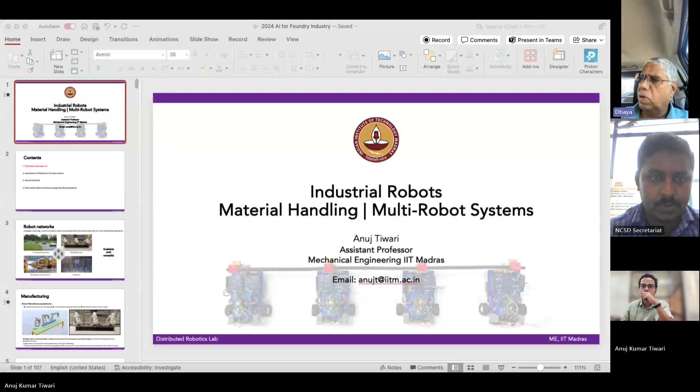It's okay sir, working, thank you. Sir, you can close it, we are expecting around 60 to 70 people, so once some 40 people join, then we will start the program.

The agenda is like this. First we will welcome the gathering. Second, we will read your biodata. Third, you can start the presentation. Then at the end of it we will see if any questions are there. We will ask the participants to ask questions, you have to answer, and then finally we will thank everyone and close. This is the program agenda, sir.

Thank you, is there any doubt or clarification required? No, thank you. Okay, we will wait for a few minutes, sir.

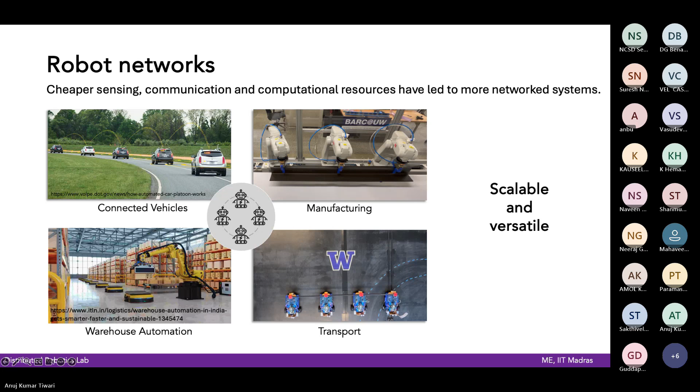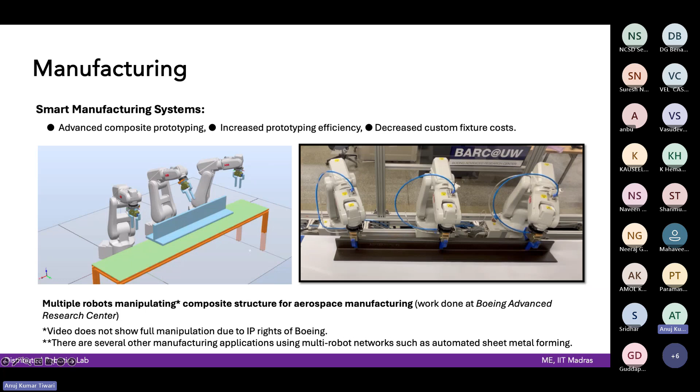One application I looked at during my postdoc was advanced composite manufacturing, where we wanted to use these multi-robot networks for handling and molding composite structures that were still in their green state, that is, not yet cured. This was looked at for decreasing custom fixture costs, and this work was done at Boeing Advanced Research Center.

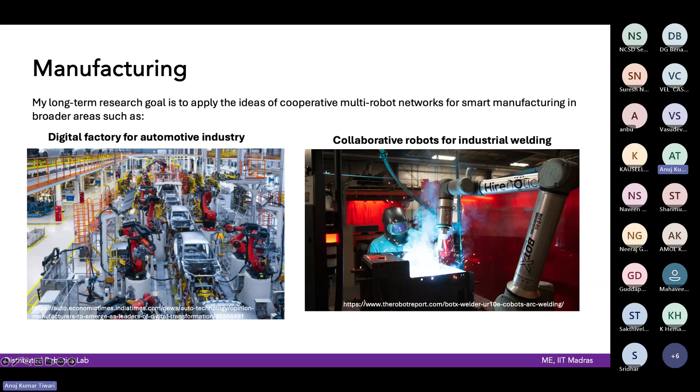Besides that, my long-term goal is to bring industrial robots into the automotive industry and other applications such as welding. Since I'm talking to people from the foundry industry, robotics also has applications beneficial for the foundry industry. For instance, high temperature molten metal, dust, noise, and fumes can make foundries unpleasant and hazardous places for people, so these are ideal locations for robots configured to work in these harsh environments.

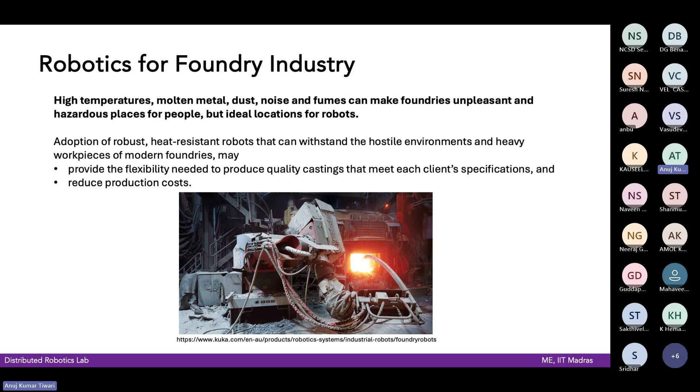Adoption of robust, heat-resistant robots that can withstand the hostile environments and heavy workpieces of modern foundries may provide the flexibility needed to produce quality castings that meet each client's specification and reduce production costs, because the same system can be used to form multiple different castings.

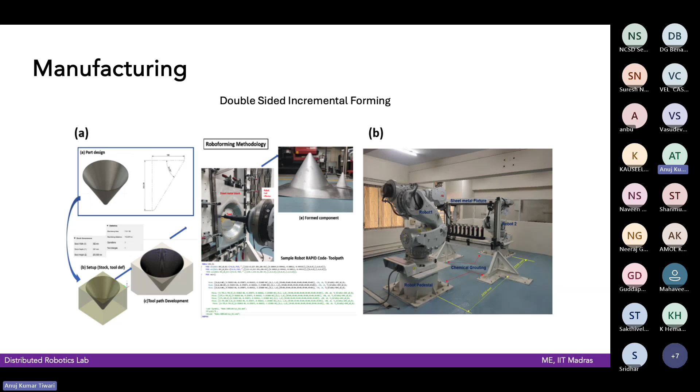That was one of the rationales behind using robots even in double-sided incremental forming, because traditionally you use a die and make a component by punching that die into a sheet metal, which is usually easy to control and implement. But it is not very cost effective during the prototyping or designing phase, where you want the same system to make different shapes, while a single die can only make a single shape. So you want a system efficient at prototyping different shapes using the same tool head, which decreases custom die costs and lets you make different components using the same forming system.

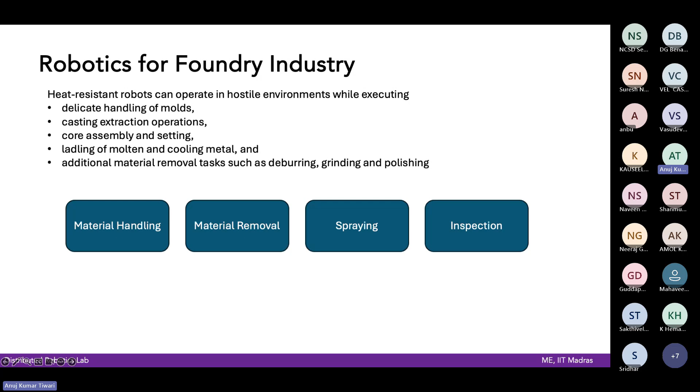Heat-resistant robots can be used to handle many different applications within the foundry industry: handling of molds, casting extraction operations, core assembly and setting, ladling of molten and cooling metal, and additional material removal tasks such as deburring, grinding, and polishing. Today, the research I will present deals mainly with material handling, but similar concepts can be expanded to many other applications within the foundry industry.

Now, as we know, when we talk about robots, we have to talk about types of robots. We can have Cartesian robots, which only have degrees of freedom in the X, Y, and Z domain. So these are called Cartesian robots.

Articulated robots have serial joints. These are the most popular type of industrial robots we see.

You can have SCARA robots, which can have very high stiffness in one direction. So this can be used for operations where there is a high contact force at the end effector of the robot in one particular direction, but then it can move in a plane very easily.

Delta robots are mainly used for handling very delicate systems, mainly used in surgical robots.

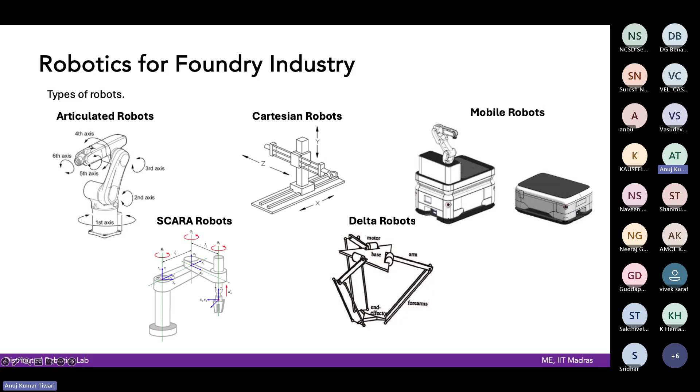You can also have mobile robots, where the robots are not fixed at a particular location but are mounted on mobile systems, which can make it a mobile manipulator. These can be used many times in warehouses or factory floors for material handling.

So we'll focus a little bit more on industrial robots. Then we will try to go a bit deeper into the research that I have done in material transport using multi-robot networks. As you have seen before, even robots can be of multiple different types.

Cartesian robots, articulated robots, SCARA robots - there are more types of robots such as cylindrical robots and spherical robots. These are different joint configurations that you can have, and it makes the available workspace of the robot different based on the different types, and also certain features like high stiffness in certain directions compared to others.

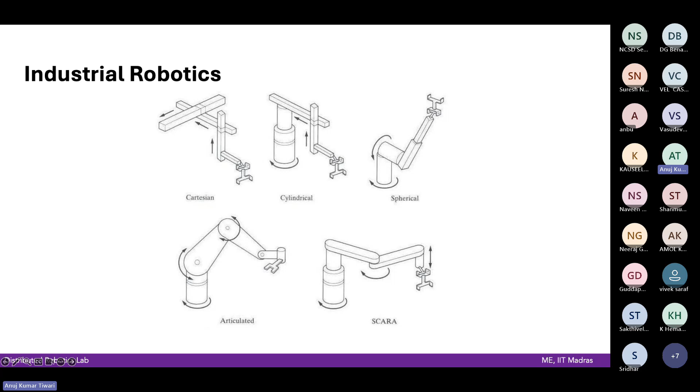So let's try to see what are the different components that you need to think about when you're talking about using a robot in one of your own applications.

Let us consider the following task: a very simple task of picking up an object from a tabletop and placing it at another place on the tabletop. In order to implement this task, the robot has to first determine the position of the object relative to the base of the robot. For that, it can use some perception sensors such as vision.

Then it needs to move the gripper, that is the tool at the end effector of the robot, towards the object without colliding with the environment. That means it needs to plan the path of its tool and control the tool to follow that path. So planning and control are another component of industrial robotics.

Then it needs to grasp the object. Let's say you have an off and on button - this is a pneumatic gripper. It can turn on the pressure or turn off the pressure, so it will either close, open, or change the direction of the pressure.

Then after grasping the object, you move the grasped object towards the desired position without colliding with the environment again, and then you release the object.

Some industrial applications of industrial robots include assembly, drilling, riveting, etc. But they require precise control on even the contact force, not only on the trajectory of the end effector, where the robot has to come into physical contact with the environment.

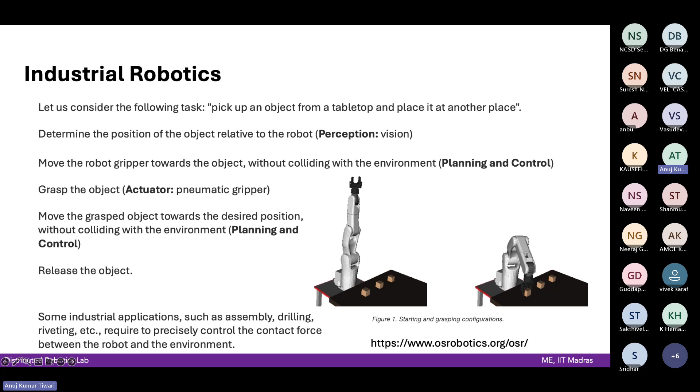So for the robot manipulator to perform a task, for example grasping or drilling like we saw in the previous slide, one needs to bring its end effector to an appropriate position or orientation. But when you look at a robot, you first see the joints, and joints have motors, and you can usually control only the motors. So motors are the actuators in this particular system.

So you want to do a task which is in the end effector domain - that is the task space. But let's say you can only control the angles. So you need to form a relationship between the joint angles of the robot and the corresponding position or orientation that the end effector takes for those joint angles.

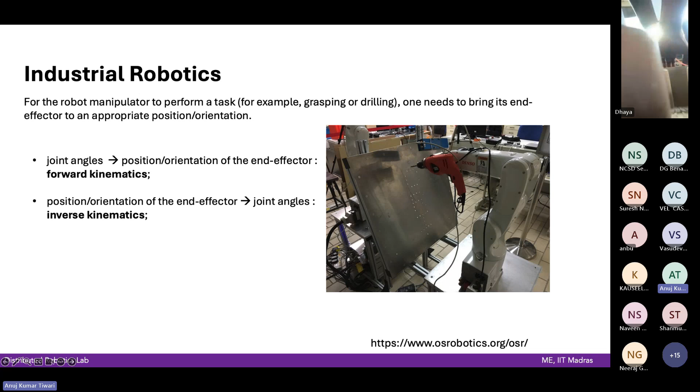So this is called forward kinematics - this relationship between the joint angles of the robot and the end effector position. The reverse is called inverse kinematics. Given a position or orientation of the end effector, what will be the joint angle that will give you that position or orientation of the end effector of the robot - that is called inverse kinematics.

But as you can see, this is very non-linear. If you've done any course in controls or systems, you know nonlinear systems are very hard to control, because the mapping is not linear between theta 1, theta 2, and x and y. So this is not very easy to implement.

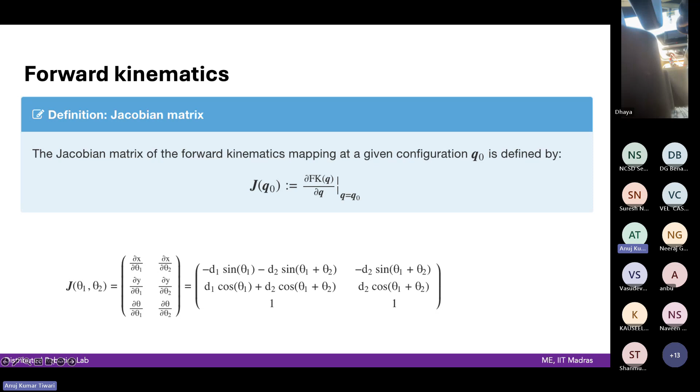Now, this is only a two-link robot. If you increase the number of degrees of freedom, a general robot you'll get in your factory will be a 6 degree of freedom robot, unlike this one which only has two, if you exclude the motion the gripper can have. So this equation becomes even more complex. For that, we use the Jacobian matrix, which relates the rate of change of the end effector position to the rate of change of the angles of the joint motors. This Jacobian is easier to work with, because it changes the system into a linearized one.

Suppose that we want to place the gripper end effector at some x desired and y desired. The gripper orientation does not matter for now, so we don't take that into account. We want to find the corresponding theta 1 and theta 2, which we represent as theta 1 star and theta 2 star, that achieve this end effector position for this two-link robot.

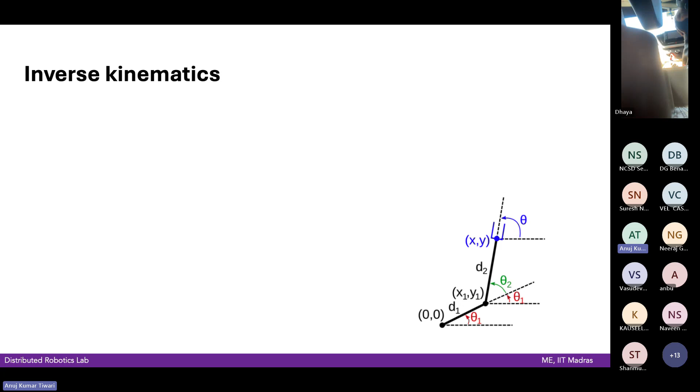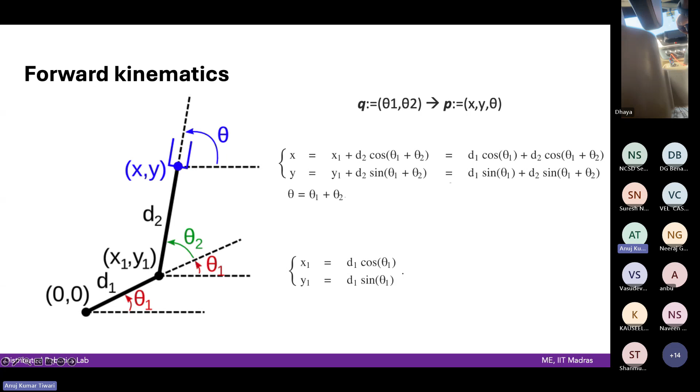For that, you can try to solve it using trigonometry. What we actually do is take the square of this and add. We see that somewhere it will be cos squared theta 1 plus theta 2, sin squared theta 1 plus theta 2. If you take d2 squared common, it will become sine squared plus cos squared. From trigonometric relations, remember sine squared plus cos squared equals 1. That's how you simplify these non-linear trigonometric terms into only linear terms, after which you can get theta 1, and similarly you can get theta 2.

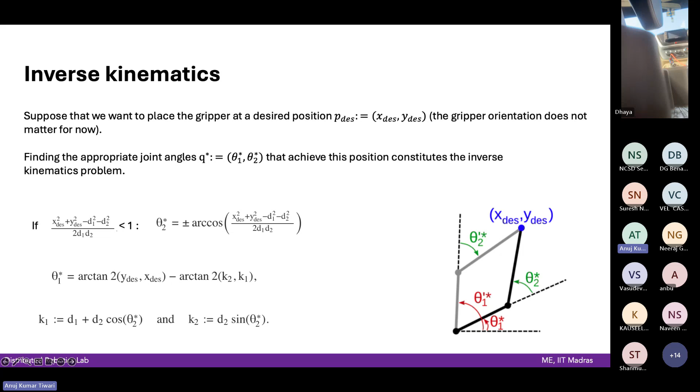So you can get theta 1 and theta 2, but again these are not very easy things to find out. We can do it by hand for a two-link robot, but for a 6 degree of freedom robot, it is very hard to solve by hand.

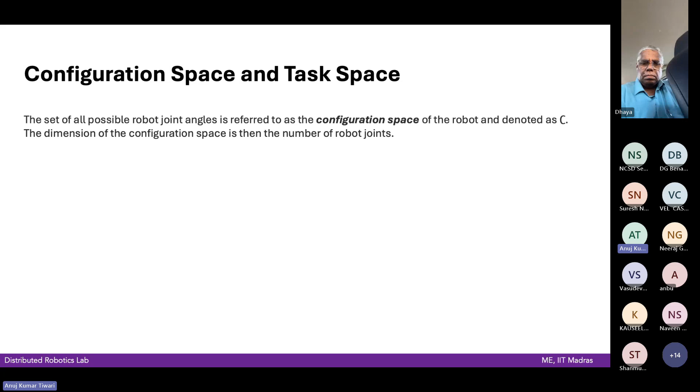So this is where we want to talk about configuration space and task space. Task space, like I defined before, is the end effector space where you have to do the task, either drilling, polishing, or material handling — you are only concerned with the end effector position. Whereas configuration space is the angle space of the robot, that is theta 1, theta 2, up to theta 6 if you have 6 joints. The set of all possible robot joint angles is referred to as the configuration space, denoted as C. The dimension of the configuration space is the number of robot joints, so a two-link robot will have a two-dimensional configuration space. The task space is defined with respect to the task at hand, so it is not fixed — it depends on the particular task you want to do.

Let me explain through an example. To properly grasp an object, when the task is grasping, the end effector of the robot must be placed in a precise 3D position and 3D orientation — your XYZ is fixed, and your theta X, theta Y, and theta Z are fixed. In this case, the task space is the set of all desired 3D positions and orientations, which has dimension 6, because we have 3 translational coordinates and 3 rotational coordinates. So even your task space has 6 degrees of freedom.

Whereas in a drilling task, one needs to place the tip of the drill bit at the desired location, so its XYZ is fixed. And to ensure the drill bit is perpendicular to the drill surface, it has to take care of theta X and theta Y, 2 orientation coordinates. But the drill is anyway rotating freely in theta Z, so the rotation around the surface normal is irrelevant — you can still drill for any theta Z value. So in this case, the task space dimension is 1 less than the previous example: only 3 translational dimensions and 2 orientation dimensions, so the task dimension is 5 here.

The reason we want to think about configuration space and task space when using a robot is that, in general, the dimension of the configuration space must be larger or equal to the dimension of the task space. Configuration space is the ability of the robot, and task space is the required degrees of freedom to do a task. If the ability of the robot is less than the degrees of freedom needed for a particular task, then that robot cannot fulfill that task.

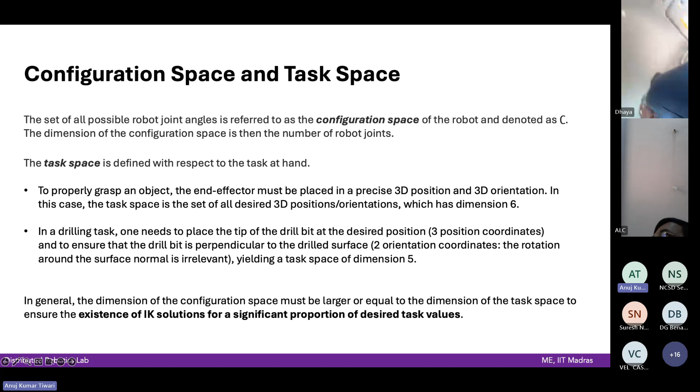So the ability of the robot should always be greater than the task space requirements. That is, configuration space dimensions must be larger or equal to the dimensions of the task space to ensure the existence of inverse kinematic solutions for a significant portion of the desired task values, so that you can find theta 1 to theta n values for an n degree of freedom robot given an XYZ location of the end effector.

Now, when you have more joint angles than the dimension of your end effector space, you can have multiple solutions which satisfy your task space condition. Let's say your condition is to keep the end effector of a two-link robot at x equals x desired, where you don't care about y. Your task space dimension is 1, but you have two options, theta 1 and theta 2, and different combinations of theta 1 and theta 2 can give you x equals x desired. All have the same x value but different y values, but you only want to control x. So it will have redundant solutions.

So how do you pick one solution out of these? You can add some optimization conditions and try to fix these two theta values on top of it. But this is something that arises when your configuration space has more dimensions compared to the task space dimensions.

We have seen in the inverse kinematic derivations for the planar 2 degree of freedom manipulator in the previous slides, where there were so many sine and cosine terms, that the equations are quite complex, involving multiple inverse trigonometric functions, tan inverse, and validity conditions, like something should be less than 1 to be an argument of cos. For general 6 degree of freedom manipulators and 6 degree of freedom task spaces, which constitute the most common use of inverse kinematics, most task spaces are high dimensional, and most robots have 6 degree of freedom manipulators.

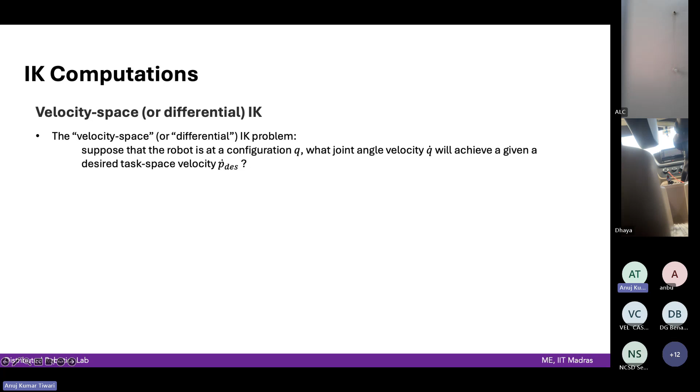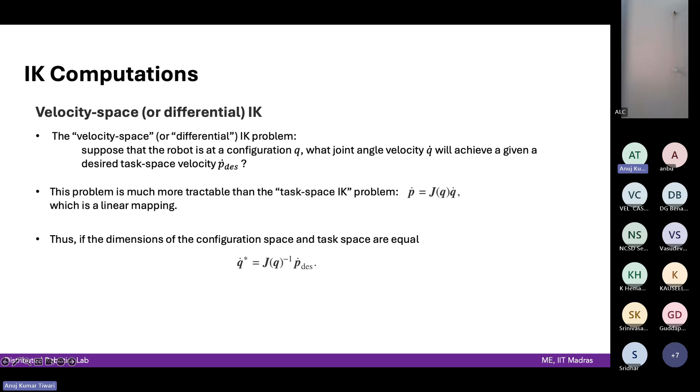For that, you can use the Jacobian of the robot at the particular configuration value Q, because it is a function of Q, and this is a linear mapping. Once you have written it like this, you can write Q dot equals J inverse P dot, because J is a matrix and becomes constant when you set the values of Q. This inverse is only possible when J is a square matrix, and it is a square matrix only when Q has the same dimension as P. That is, if P is 6-dimensional, Q should also be 6-dimensional.

If the dimension of the configuration space is strictly larger than the dimension of the task space, that is the redundant case where multiple joint angles are possible for the same end effector position, then we have multiple solutions, of which an optimal solution can be chosen. For instance, if one is interested in the smallest joint angle velocity, then taking the pseudo inverse of J, which you must have read about in your mathematics classes, can be used to find Q dot given a P dot.

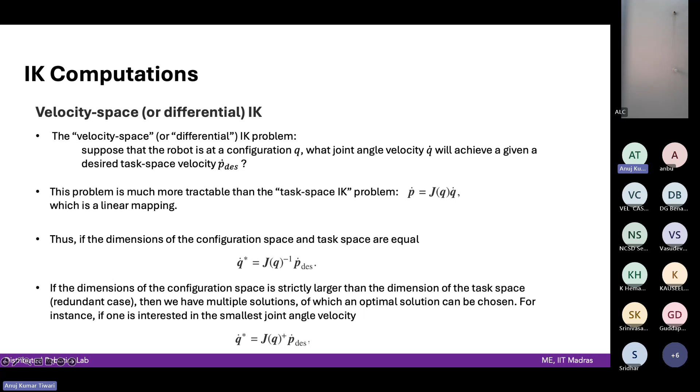And all these computations are taken care of for you. Rapid is a programming language developed by ABB for their own robots. Similarly, Fanuc has Karel, Kuka has KRL, and universal robots can be controlled through RoboDK. So all of these have libraries, and usually, in ABB, if you want to move the robot, you just use a function like move L, provide the end effector position where you want it to go, and the program itself will calculate the joint angles needed to reach that position. But it's good to know these under-the-hood operations too, broadly, to understand what's happening.

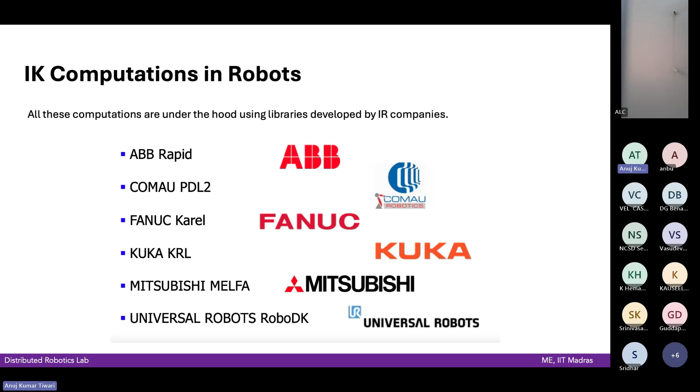Now, so far we have looked at robotic applications where the end effector is free. Let's say you want to track a trajectory with the end effector, which is good for certain applications like inspection. You can mount a camera at the end effector of a robot, and in order to inspect a particular component, you have some desired trajectory. According to that trajectory, you can find through inverse kinematics the angular position at the joint encoders, at the joint level, and control the robot.

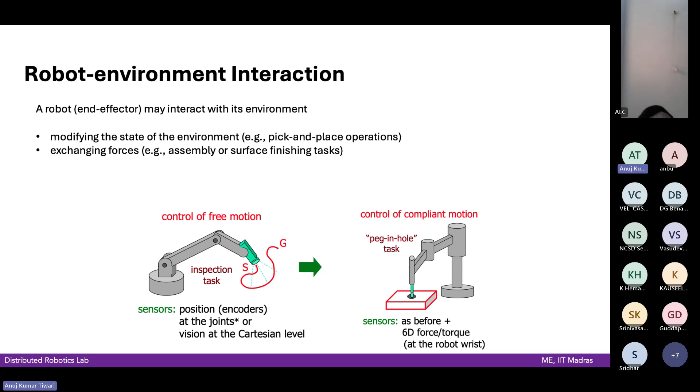But a robot end effector may interact with its environment, meaning it might modify the state of the environment, changing the location of certain objects or exchanging forces. For example, in assembly operations like a screwing task, you have to provide torque to screw and assemble components. In surface finishing tasks, you have polishing or material removal processes. In these cases, the robot is exchanging forces with the external environment, where many times the external environment is the workpiece, just like the sheet metal forming example I showed earlier.

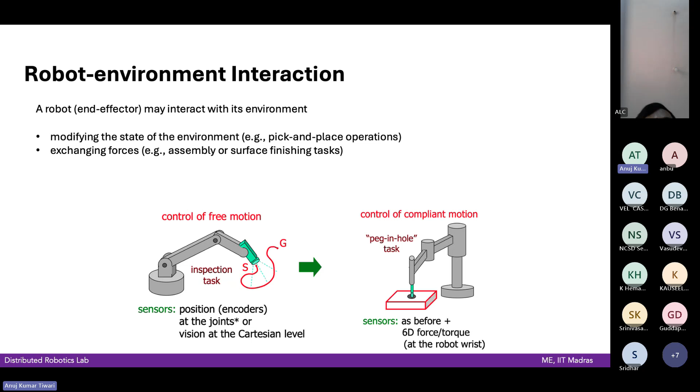In order to do this interaction with the environment, where the environment can be a workpiece, the robot end effector may be equipped with devices so they can control the forces. One way of controlling the force is passively, meaning you have certain devices mounted on the end effector which comply with the generalized forces applied at the tool center point. You can also go with active control, where robot position is controlled using some sort of feedback of the forces at the end effector, typically measured by a force torque sensor, such as a 6-axis force torque sensor supplied by ATI.

There are different types of control you can do to manage the active interaction between robot and environment. For instance, admittance control, stiffness or compliance control, and impedance control. In order to control the position of the robot with some force feedback, there are many different approaches available to control the actuations in the joints of the robot.

One such approach, a very simple one, is limited sequence control. It is implemented by setting limits or mechanical stops at each joint, which you often do when setting up a new industrial robot, especially if it is a huge robot like a metal forming robot. You usually have mechanical locks on the joint so that in no operational condition can the joint value exceed a certain limit, because otherwise the robot might not be safe, it might hit the roof or a beam or something like that. So you can have mechanical stops for each joint, and then you sequence the actuation of the joints to accomplish the task: first you move joint 1, then joint 2, joint 3, joint 4. So this is how you do limited sequence control of the joints.

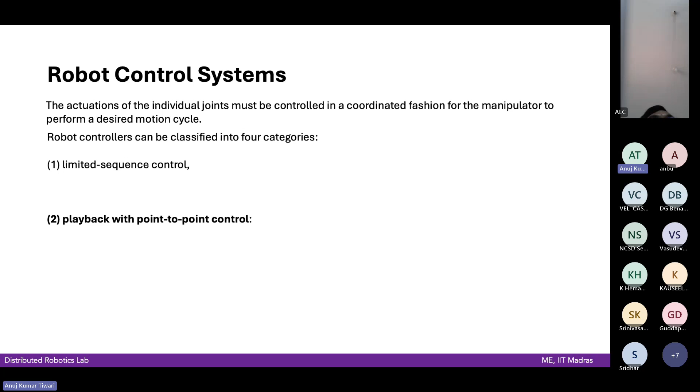In step 1, you move joint 1, step 2, you move joint 2, and so on. This is playback with point-to-point control, where you move the robot either physically, in case of a collaborative robot, or if it's not a cobot, you teleoperate it using a pendant or teleoperation device, moving it from A to B, C, D, E, and F, then asking it to repeat.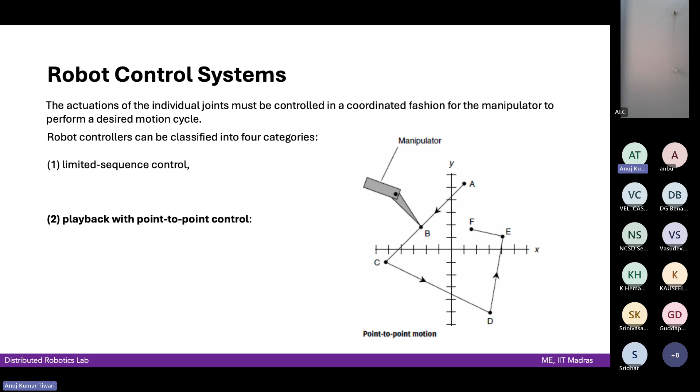While you're moving it, either through teleoperation or physically interacting with the manipulator if it's a cobot, it is recording the joint angles, creating a history of joint angles. Later, when you ask it to play back the same trajectory in the end effector, all it does is play back the joint angle history, and it will move along the same sequence of motion.

So the earlier one was point-to-point control, where the end effector being at a particular point was only required at the ends of these trajectories. In between, the interpolation can be anything.

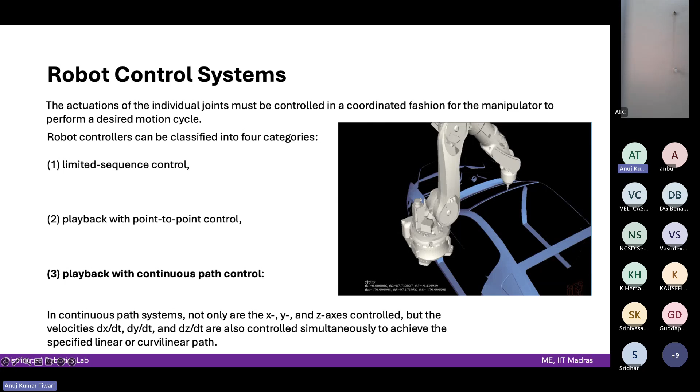But many times you also want to control the continuous path in between the point-to-point control. So in continuous path systems, not only the XYZ axes are controlled, but the velocities dx/dt, dy/dt, and dz/dt are also controlled simultaneously to achieve the specified linear or curvilinear path between the two points, which is applicable when, let's say, you want to do a sealant application in certain places on your workpiece.

Intelligent control is a fourth type of control, which provides the robot the capacity to interact with its environment, make decisions when things go wrong - that is, it has some decision-making capability locally during the work cycle - communicate with humans, make computations during the motion cycle, and respond to advanced sensor inputs such as machine vision. This is the most advanced type of control.

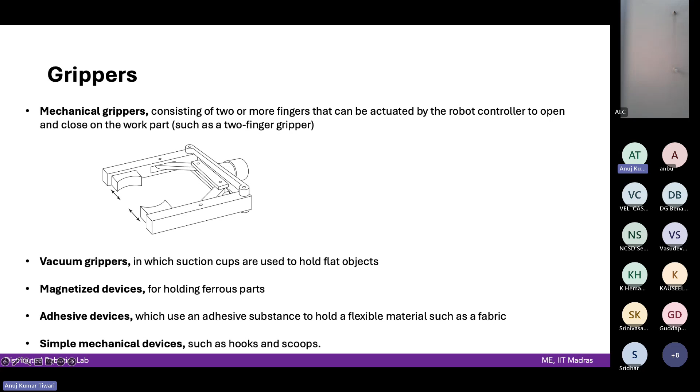In order to interact with the environment, there should be some sort of mechanical system at the end effector of the robot, which differs for different applications, such as mechanical grippers. These are some of the most common ones, where you have two jaws which can be actuated pneumatically or electrically, used to close on a particular work part and then either move it or modify it.

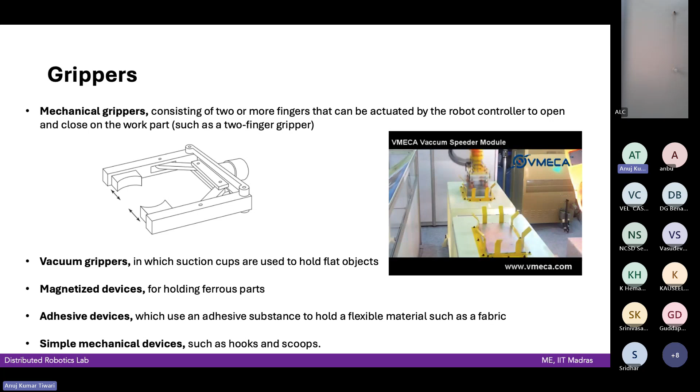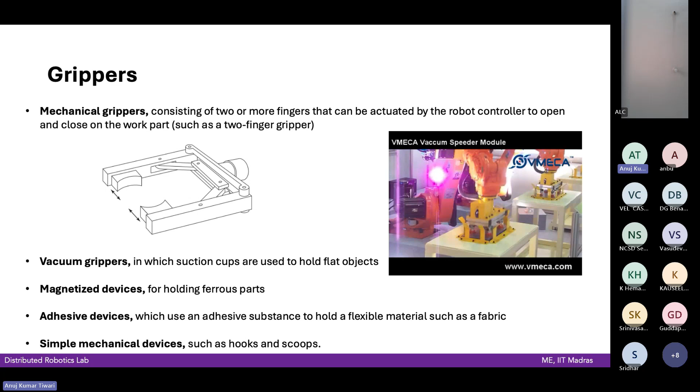Vacuum grippers are used extensively in the sheet metal industry, where suction cups hold flat sheet metals and move them from one place to another. You can also use magnetized devices for ferrous parts, or adhesive devices which use an adhesive substance to hold a flexible material such as flat fabric. You can also use simple mechanical devices like hooks or scoops.

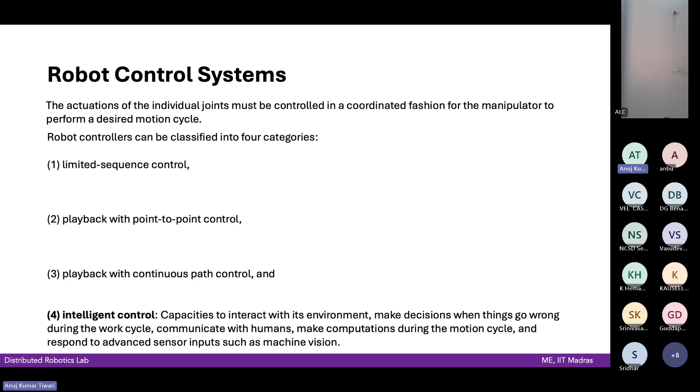Many times you don't want to just teach a robot a trajectory using one of these control types, but you want it to have some sort of intelligent control. So in order to implement any intelligent control, you have to do robot programming - that is, write or develop a program and put it on the robot. For this, three programming methods can be distinguished.

Lead through program can be either manual or automatic. One example of lead through program is given here, where you manually move the robot. Since it's a cobot, it's safe to do this. You press a key to close the gripper, since that's a separate control, and then you play back the motion - while you were doing that, the robot was recording the joint trajectories, and it will end up at the same location, then close and grab the object.

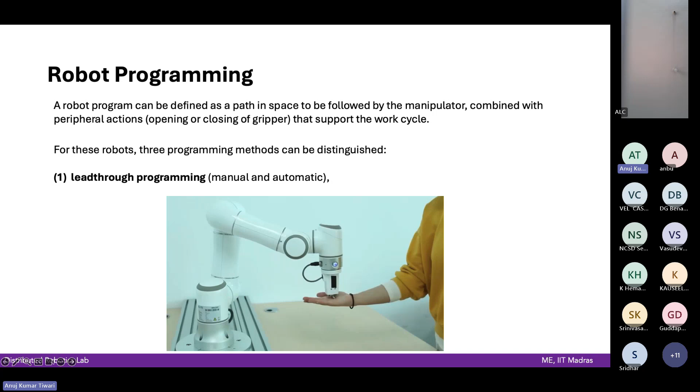This is lead through programming, and it is manual, but the same thing can be done automatically, where you have some sort of program that teaches it.

But these things can only be done for very simple operations, such as pick up, place, and things like that. When you have complex operations like sheet metal forming...

I think someone again unmuted themselves.

So this is only possible in very simple examples, but in certain cases, let's say you want to control a certain level of force - you want to do force control so that when your end effector with the tool is in contact with the sheet metal, it applies a certain level of normal force. If you over push, normal force increases; if you under push, normal force decreases. So you have to do position control of the robot end effector with force feedback.

In order to implement a programming logic like that, you have to write code for it and then put it onto the robot. For that, there are several interfaces provided. Many robot companies provide those interfaces themselves with different programming languages, but usually under the hood all of them are C++ codes, because C++ is the most real-time in execution. They provide wrappers around those C++ programs that you can use to control your robot.

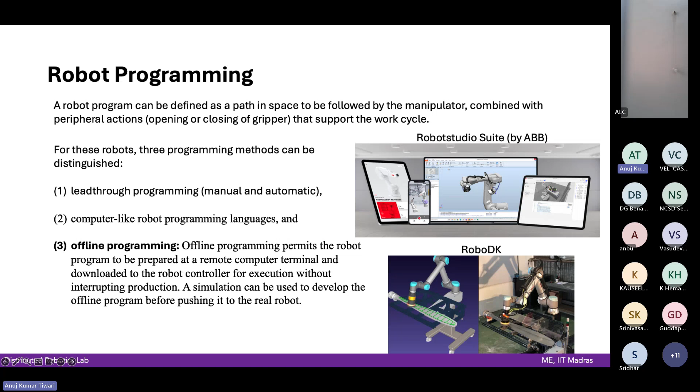Also, you can have a digital twin of your robotic manufacturing system so that you can control the robot and detect anything going on in the actual system by comparing it with the simulation system - how it should happen ideally and how it is actually happening. If there are any deviations, you can implement some control to bring it back to the nominal state.

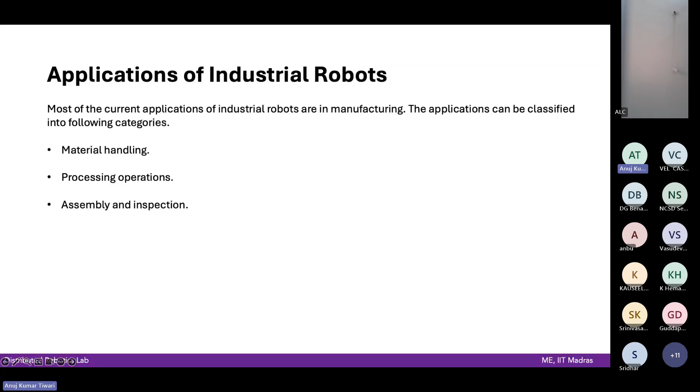Most current applications of industrial robots are in manufacturing. The applications can be classified into many different categories: material handling, processing operations, assembly and inspection, and things like that. Today I'll be mainly talking about material handling as one application.

Before I go into material handling, I also want to talk about collaborative robots. There are many cases where a robot by itself cannot execute a task, just due to the complexity of the particular task. So you have to have a human overseeing the operation, and many times a human in close quarters to the robot. In that case, for safety of the human, the robot should be collaborative - safe to work around humans. They should detect collisions and not apply more force than required in case of those collisions, to minimize injury risks to the operator.

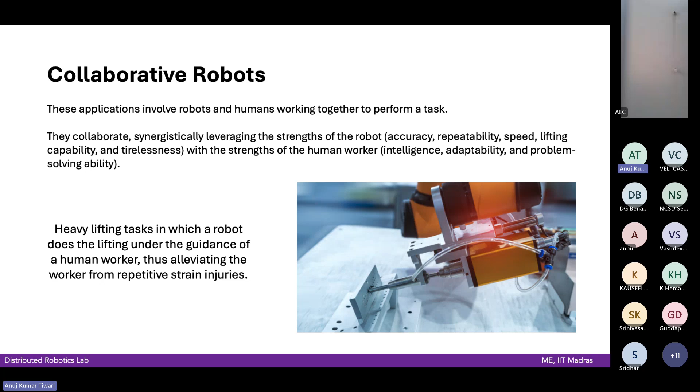Now, when you're talking about this sort of compliance, you are talking about how you can interact with your environment and do some sort of force control. This is where I want to introduce my research topic on material handling, where the material we handle is flexible. The application we were looking at is composite structures, where the composite structures have not been cured yet, so they are still flexible.

These composite structures could be as long as 60 feet. At that length scale, where other dimensions are much smaller than the length, it is actually just like a ribbon or a noodle - very flexible. So you should be able to transport such structures across the factory floor for different operations without deforming them, because in the aerospace industry, the margins are very tight, and you cannot use structures with any residual stresses or strains.

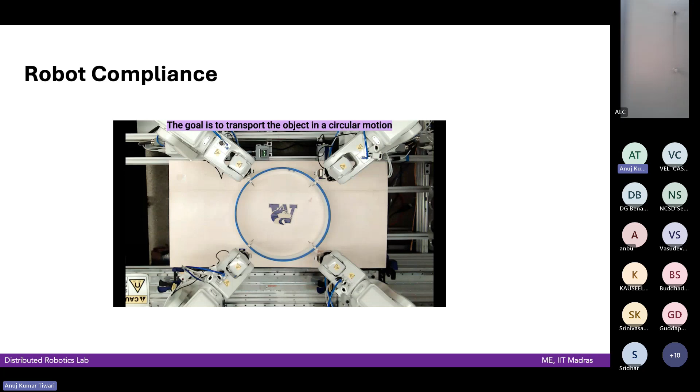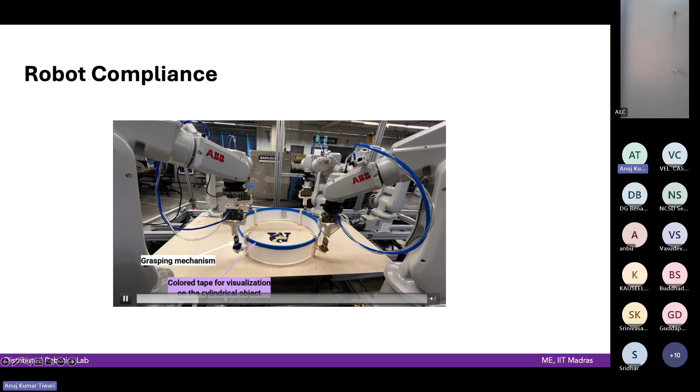We wanted to develop a multi-robot system to transport such big objects while the object was very flexible, and to minimize deformation in the object. So we wanted to use force sensors at the end effector to reduce the deformation of flexible structures when transporting them collaboratively using multiple robots. Our approach is shown on the right hand side, which I will derive in the next few slides.

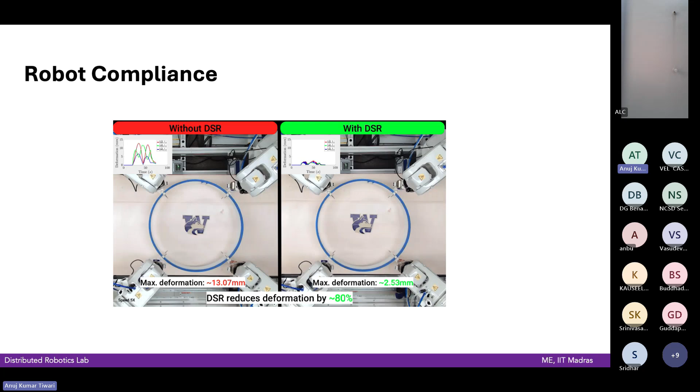Let's talk about deformable material transport using multi-robot networks, which is the flexible object transport application in my research. Before we go further, let's talk about some background on object transport.

Using multiple robots to transport objects has been taken as an inspiration from natural systems, where several ants are able to transport objects much bigger than themselves, some of them even flexible, together collaboratively without explicitly communicating with each other. They are just doing local force control and achieving the transport of objects, such as a Cheerio, which is a cereal.

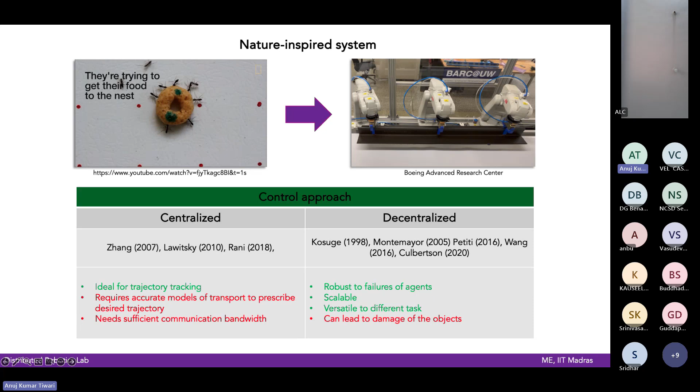So that was the inspiration for using multiple robots to do the handling of composite structures in the aerospace industry.

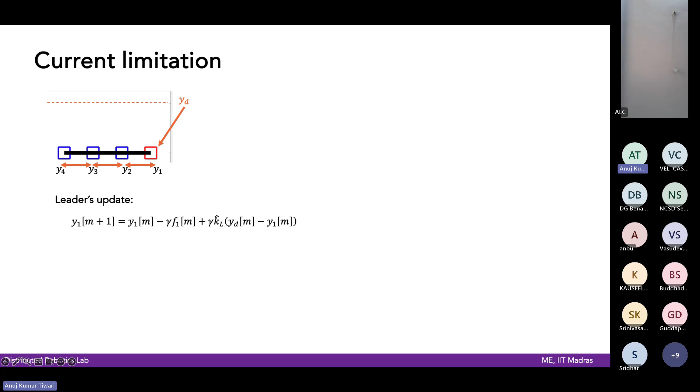For that, the leader's update can be written something like this: leader's position at the next time step m plus 1 is the leader's position at the previous time step m, updated by this term, minus gamma times f1m. So it also has some local force sensor, and it is trying to reduce the local force, but at the same time it is trying to track the desired position yd, and only y1, the leader robot, has the desired position.

And the followers' update law can be written as y sub k for the kth follower, where k goes from 2, 3 to 4, where yk at time m plus 1 equals yk at time instant m minus gamma times fkm. So it has some sensor which is giving you the local force value fk, and it is just moving in the direction where it reduces the force.

So if you simulate this simple mathematical system, you can see that during the transport, the black line is deforming. That is, it is losing its initial shape, but it comes back to its shape, assuming it has not entered the plastic region.

Now here we can look at two metrics: transport time and deformation. So we want to reduce deformation, but at the same time, we want to complete the transportation task as fast as possible.

But let's say here in this control law, all you have access to is this control gain gamma. Here you can see that if you increase the control gain gamma, you are able to transport it in a shorter amount of time, but your deformation increases.

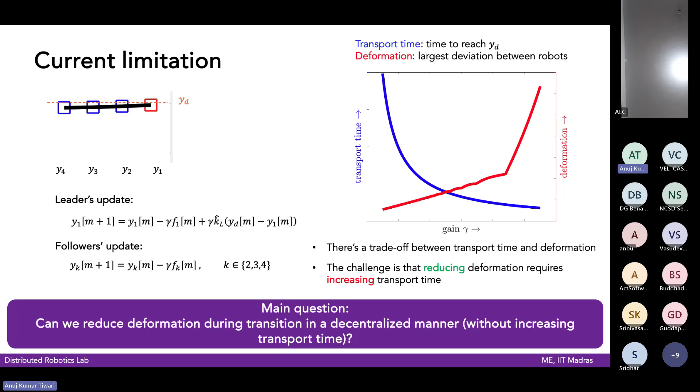So the research question you want to answer is that there is a trade-off between transport time and deformation. But the challenge is that reducing deformation requires increasing transport time. So the main question is: can we reduce deformation during transport in a decentralized manner, that is only using local force values, without increasing transport time?

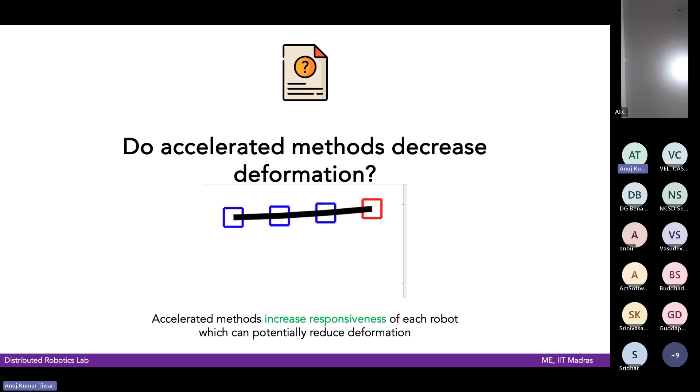So in order to do that, we can borrow some ideas from the optimization literature, where we can try to see how accelerated methods can be used to reduce deformation.

So for that, you can write again the transport equations of the simple system that I showed in simulation, but we also had an exact physical system built up, custom built robots with load cells to get local force sensor values, and flexible coil to represent the flexible object that we're transporting.

And then we can write the equations of motion as a network update law, where the state of the network is the state of all the four robots in the multi-robot system.

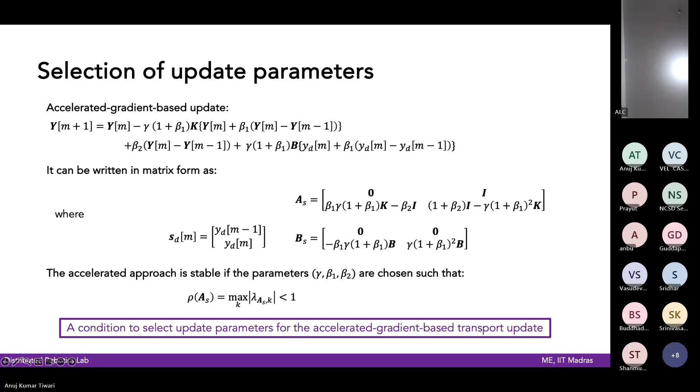And then you can use that for the accelerated gradient based approach. So we evaluated it experimentally on this system that we built ourselves.

So the desired trajectory that was given to the leader robot, which is only available to the leader robot, was a slow ramp in position. That is, the slope was 3 centimeter per second, a constant speed to reach 50 centimeter, and the initial position was 0 centimeter.

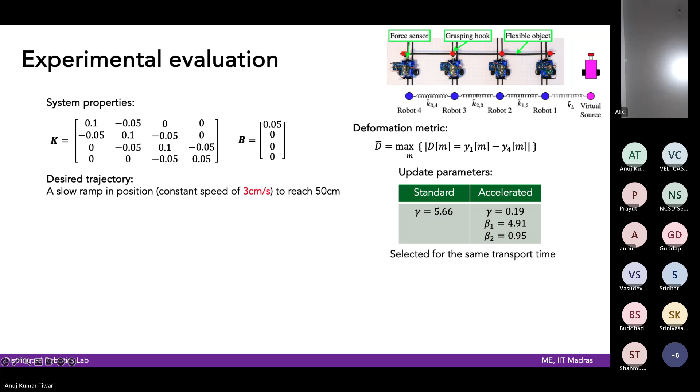And the metric was: what is the difference between the position of the first robot and the last robot, that is y1 minus y4, because usually this is the last robot to react based on the force sensor reading. And these are the parameters that were selected, chosen for the same transport time between the standard approach and the accelerated approach for fairness.

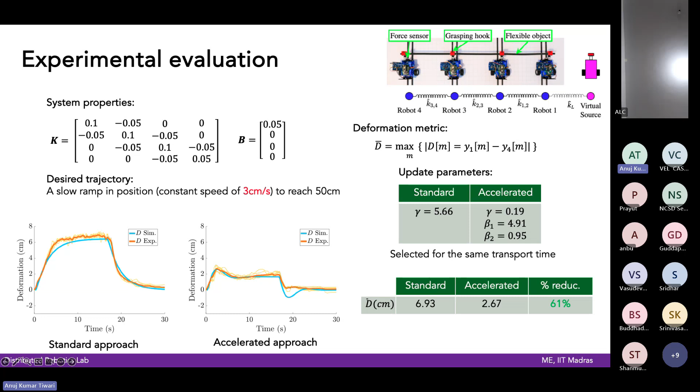So the controller that we built was able to show a 61% reduction in deformation of the flexible object when transporting it linearly.

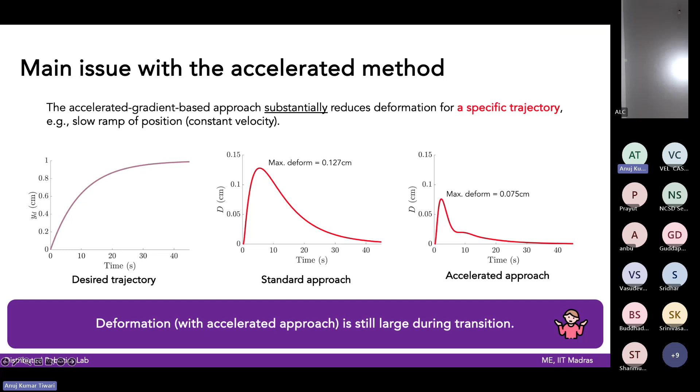There are still some issues with the accelerated method where it has to be optimized for a particular desired trajectory. So can we do better? Can we go beyond the accelerated approach?

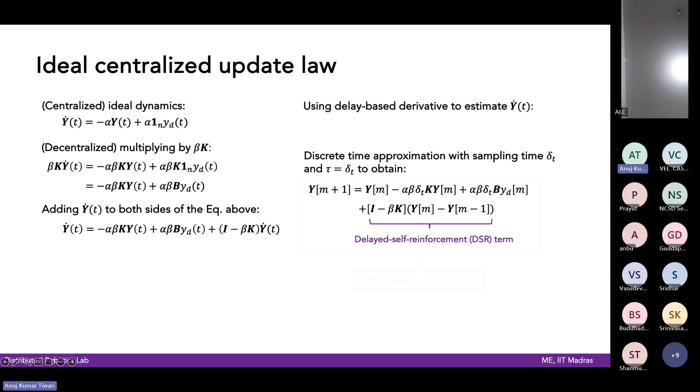But so far we have only shown 1D translation. In any transport task, you will eventually want to do 2D transportation. For that, the approach that we developed in DSR is not directly applicable. So we made some changes in terms of how to do orientation change while doing the transport task, and still develop a method that reduces deformation.

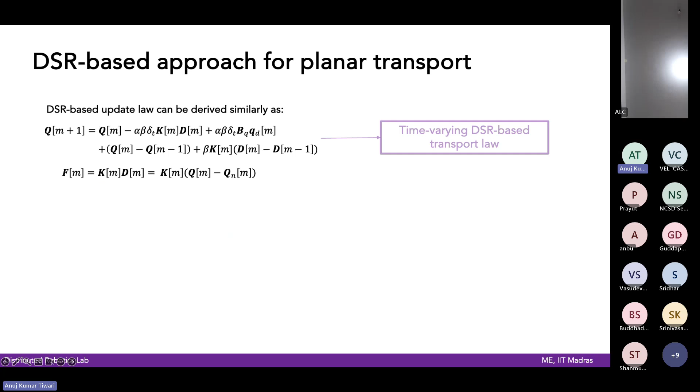So we developed a DSR based approach for planar transport where you can transport in a plane with orientation change also. The main challenge again was to select parameters while maintaining stability of the system. We used a result from 1970 from the Desoer paper to prove frozen time stability and then slowly varying time stability using Lyapunov based method. But after that, we get a way of selecting our parameters.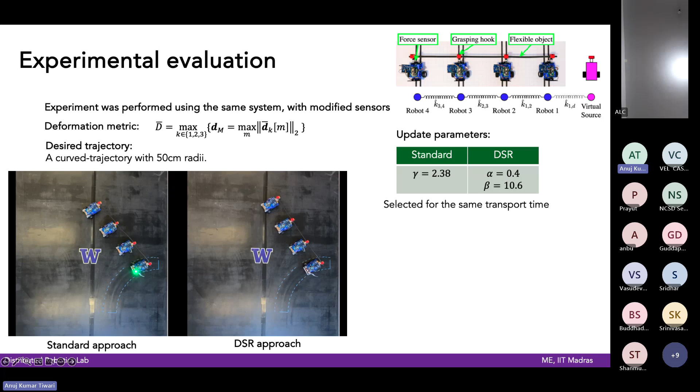And we were able to see significant reduction using the DSR-based approach for planar transport compared to the standard approach, approximately 72% reduction. But so far, we have shown results only on custom robots. How does it perform on industrial robots?

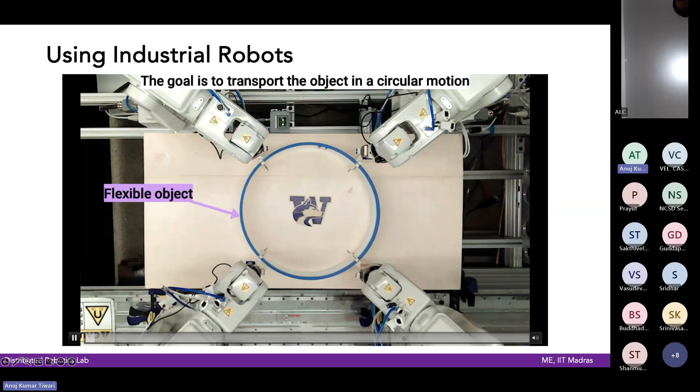That is something that we showed here, where again, there is a leader robot which initiates a circular trajectory, so it moves in a circular fashion. And the follower robots sense local non-zero force readings using 6-axis force torque sensors and move to reduce the force value. We have 3 follower robots.

So if I pause it here, these are clamps to add the force torque sensor. And after the force torque sensor, we have the pneumatic grippers, where the jaws of the pneumatic grippers were 3D printed. And this is a flexible object.

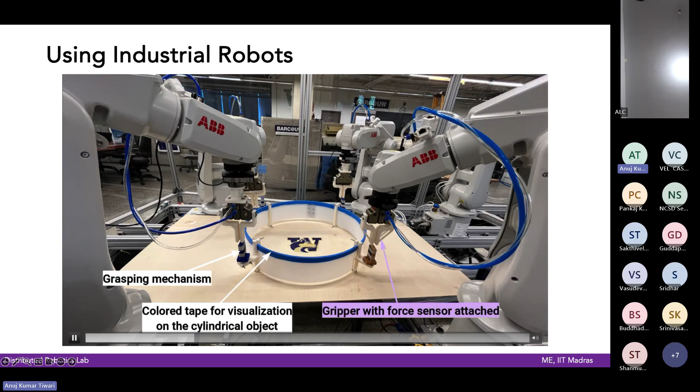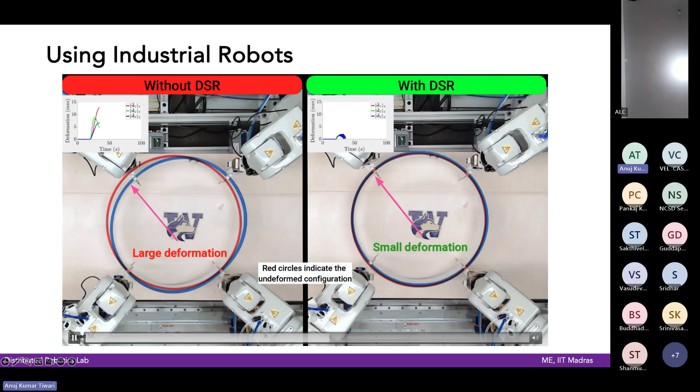We have a tape on the top just to show when it deforms, it's easier to see with the tape. And then we overlay a red circle, which denotes the undeformed shape. So if the blue tape matches with the red circle, then it is not deformed. If it is very different, then the deformation is larger.

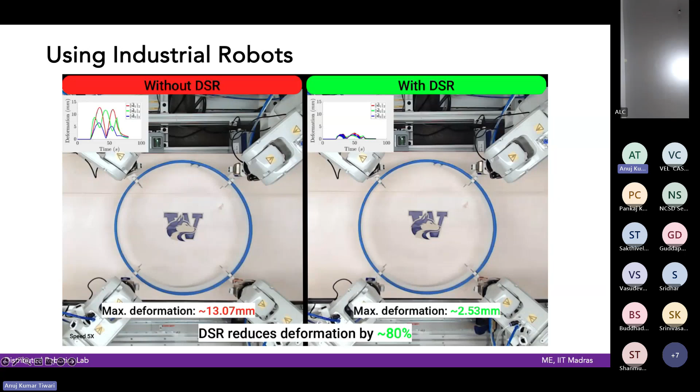And as you can see, the max deformation with the proposed approach is approximately 80% smaller than the standard approach. So we were able to show that the same approach that we developed using a very simple mathematical model, tested on custom built robots in small experiments, transfers directly to industrial robots, with significant reduction in deformation of the flexible object during the transport task.

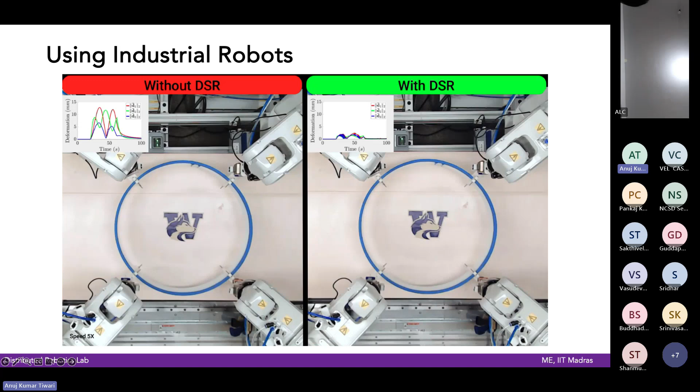So we are looking at approaches of further reducing deformation. But I think I'll just skip that.

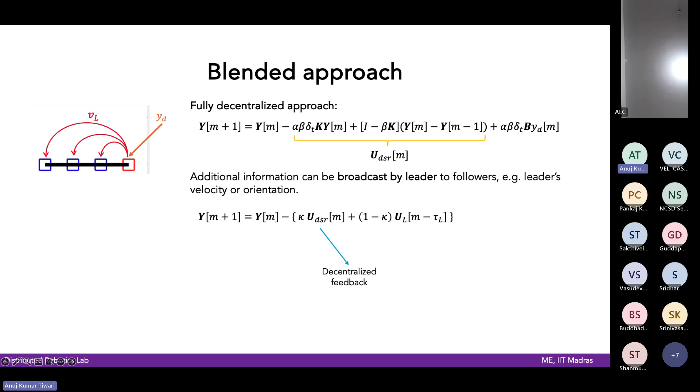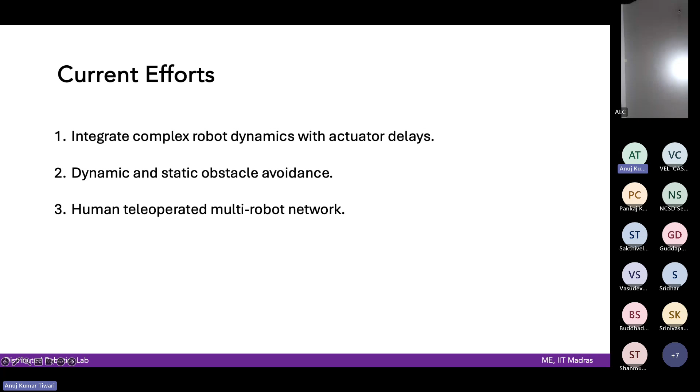So we are looking at the aspects of delay. Current efforts are integrating complex robot dynamics with actuator delays into the theoretical development, dynamic and static obstacle avoidance, and human teleoperated multi-robot networks. I also use the multi-robot control that I developed for platooning in multiple vehicles, and also for coordinating multiple warehouse robots for inventory and warehouse management.

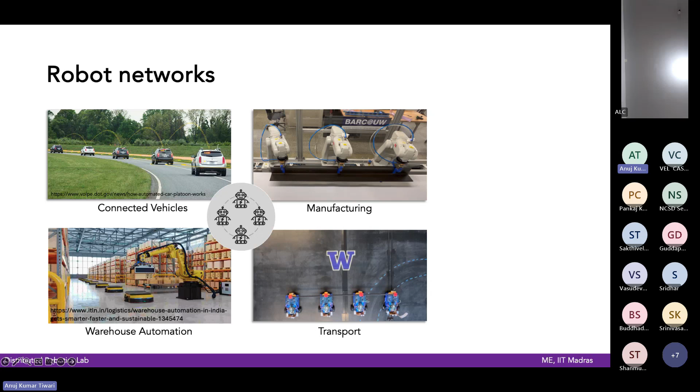So we have a project from Walmart, which is running right now, where we are trying to develop a reinforcement learning based approach for coordinating multiple robots in warehouse environments. You can see that this swarming multi-agent systems can be seen very easily in nature.

So there were some people who presented their work in Nature Physics in 2014 who saw a flock of birds doing a turning maneuver very cohesively without deforming. They saw that the turning maneuver was initiated by a few birds in the flock, and then the information propagated through the system. When we applied our control law, developed for a very different application of flexible object transport, in simulation to swarm systems, we saw that it was able to predict the low distortion information propagation, even in natural flocks. So whatever was observed empirically, it was actually working like that, even in swarm systems.

My research can be looked at as working in the area of control of networked dynamical systems, with applications in robotics and controls. One of the applications I look at is smart manufacturing, which is the main application I presented today. But I also work on warehouse control and connected vehicles.

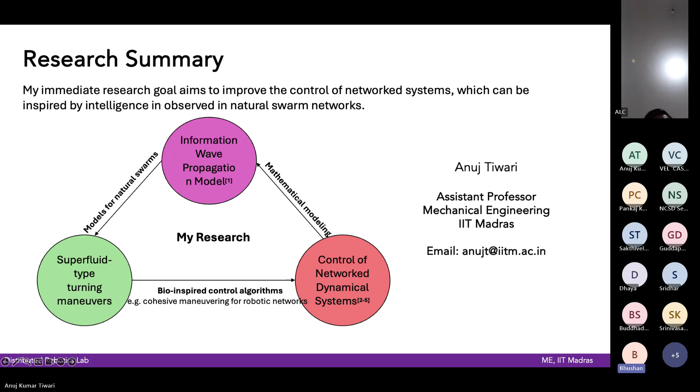Thank you very much for the insight, it was quite in-depth and technical. My question is, with this know-how, given the current challenges foundries face in fettling areas to reduce fettling time, and considering robotics has its own cost, what do you see as how Indian foundries can be impacted or how they should move forward using these kinds of tools for reducing fettling time?

I was also involved in a workshop at IIT Tirupati, where several foundry men were present, and some of them are already using these robots, mainly in material handling systems, and they were able to see significant improvements in the cycle time of a particular process. Now fettling, which is a finishing process for removing extra material, is harder to control because the robot has to interact with the surface to remove extra material from steel castings.

So those processes have to be trained - either you develop a specific controller, for which you need a certain level of know-how, so collaborating with universities you can try to automate such processes. But when you buy an industrial robot from a vendor, the level of support you get only easily allows you to automate pick and place operations, which can help you move heavy equipment or tools from one place to another faster, reducing overall cycle time - which is one of the applications people were already looking at in some foundries.